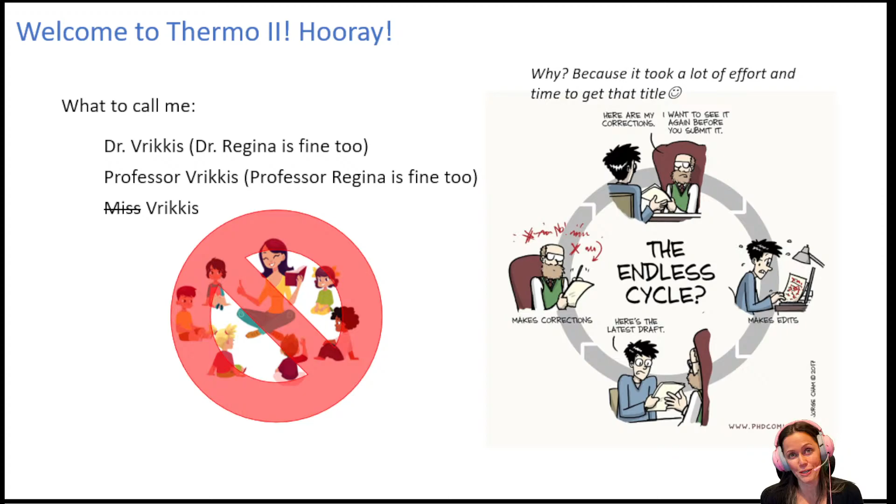I do have a couple of derpy animals. I've got my dog Leela, who's named after Leela from Futurama. I also have a couple of derpy cats, one's more derpy than the other. The gray one is glorious but also very derpy. The gray one is Joey Softballs. My husband likes to nickname most of the animals some sort of mafia name, I don't know why, I married into an Italian family, so there you go. And then Nox, as in Harry Potter, Lumos, Nox, yeah. And then I also have a couple of kids, I won't call them derpy, but a couple of kids. My daughter is Lily, she's in 2nd grade, and I have a son, Joshua, who is in middle school. Whew, don't envy that.

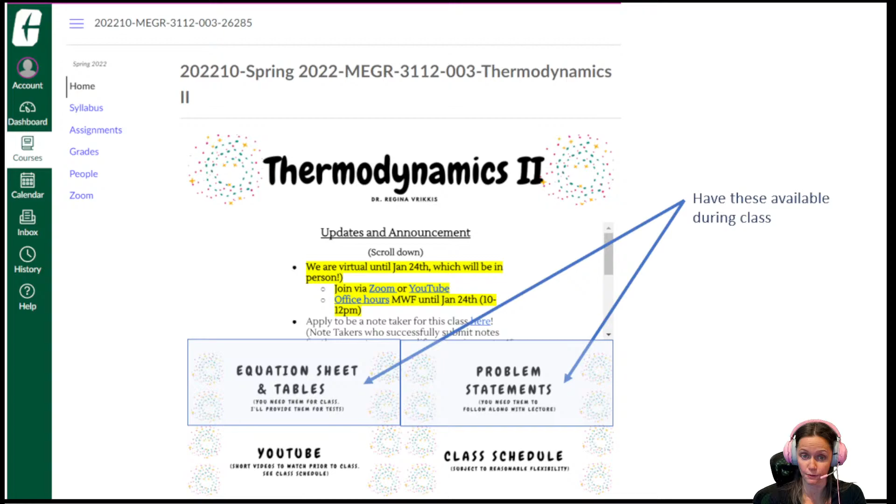That's good. I will provide you with that printed out PDF for tests, so you don't have to worry about bringing those things in. If you go to assignments, you'll see how everything's laid out.

On your view, it for some reason defaults to organizing everything by date. I see why they do it, but if you click by type, it's nice and organized and pretty—all the tests are at the top, then the final exam, and then ungraded assignments at the bottom.

Like I said, I don't have homework assignments just because of the grading burden, and we don't pay our graders enough as it is, and we really do ask a lot of them. So if I'm really giving them the work they're actually getting paid for, I can't ask them to do homework and 6 regular tests and a final exam, right?

So I don't have homework, but I do have these ungraded practice exams. The way it'll go is there'll be a couple of examples similar to what you might be asked on the test, a couple of conceptual questions, a couple of write-it-out questions, and then you'll be given the final answers after you hit submit. So once again, not graded—it's just for you to gauge how well prepared you are for the exam.

Testing is going to be done in person. I had such a horrible time last semester with academic integrity violations, specifically with Thermo 1—not so much with Thermo 2, but definitely with Thermo 1—and that was because I was doing testing online, and no matter what parameters I put in place, it was a continuing issue.

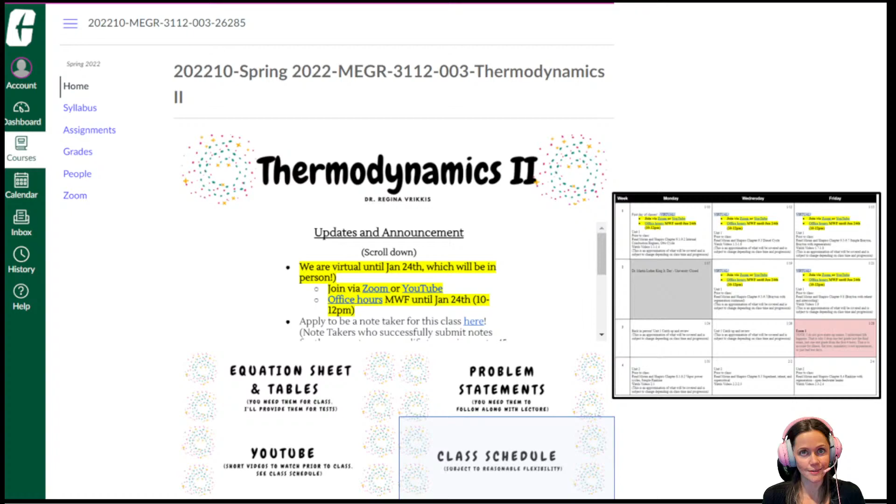So if you look at those guided notes, oh my goodness, look at those, they've got a makeover. They have clickable links in there. Amazing. So I did that last week, I was pretty proud of myself. I'm sure there's some errors there, some sort of link goes somewhere else, but hopefully everything's good.

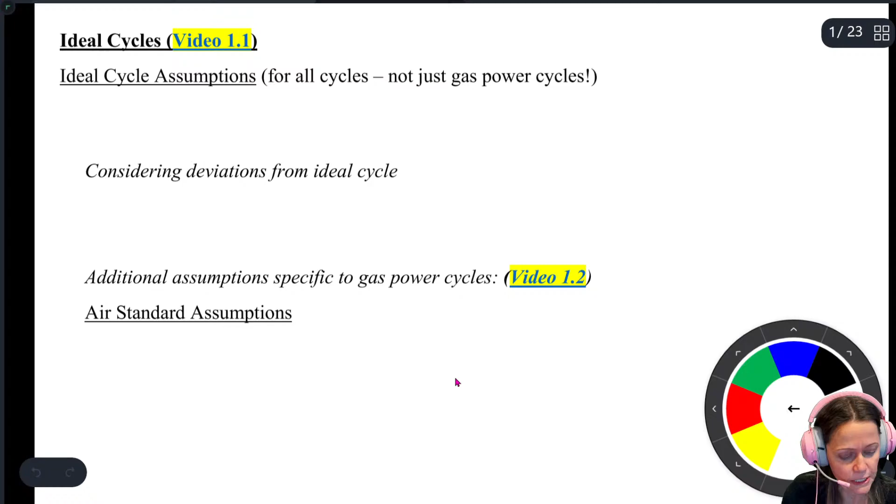All right, so ideal cycles, this is video 1.1. We're going to be talking about power cycles. Actually, I'm going to zoom in to this corner over here because we're going to be talking about cycles.

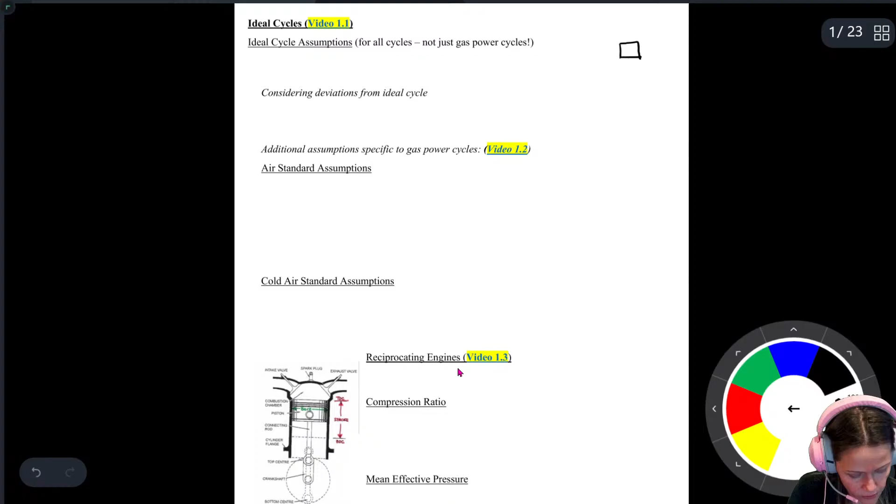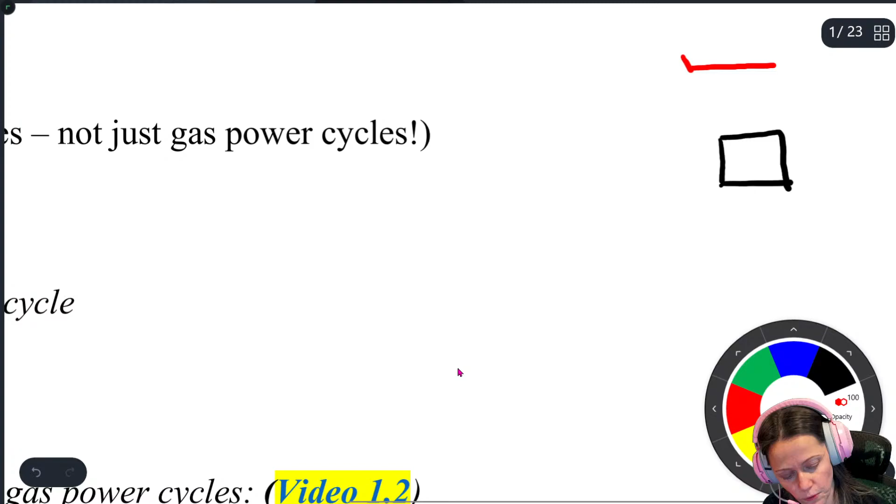We're going to be talking about ideal cycles, power cycles as well as heat pump and refrigeration cycles, and just kind of remind you of what you might have covered in Thermo 1.

We analyze these power cycles as sort of black boxes. So that box right there, that's my black box, with a clockwise arrow indicating that it's a power cycle. A power cycle works by pulling heat out of this high temperature reservoir, that's my Q dot in or Q dot H, and then it dumps some waste heat over here to our low temperature reservoir, that's our Q dot out or Q dot L. And then we have a W dot, and this is net out.

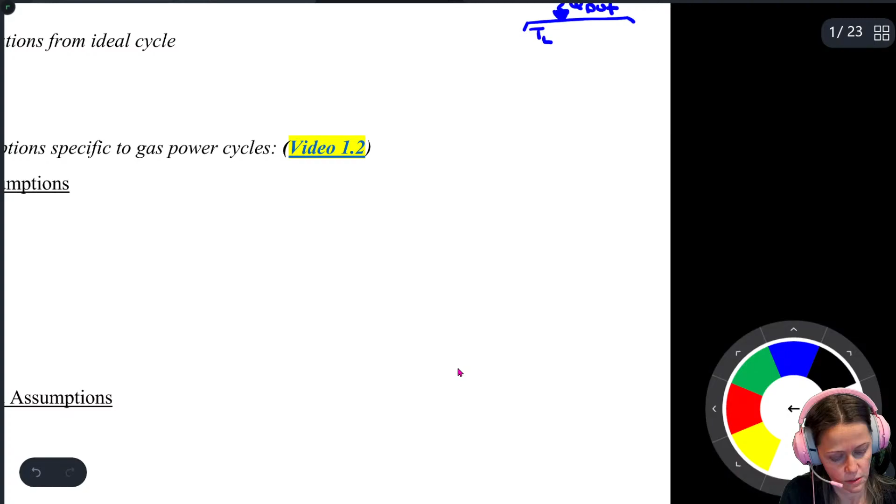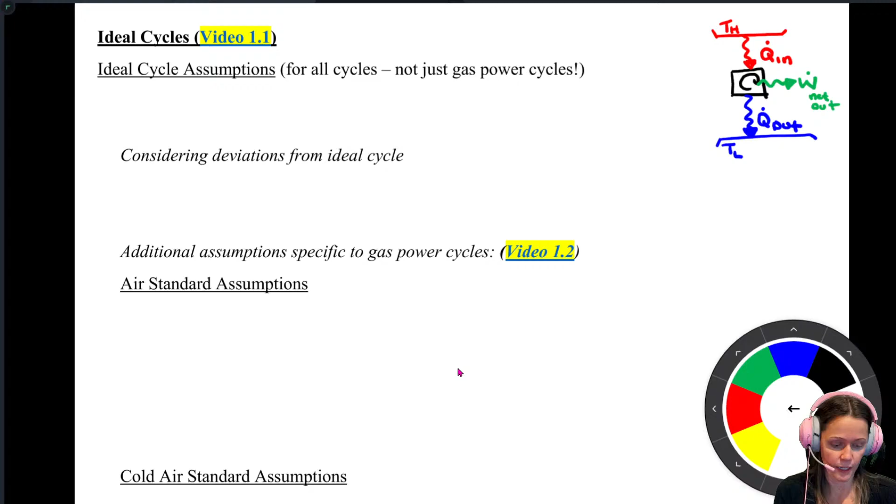Net out, so any W dot out minus W dot in. If you need a review on that, look on the second page of these notes, right there and there, those are your review videos for power cycles and what those are. But a power cycle, that's what it does. In Thermo 2, we're going to look at what actually goes on in that black box.

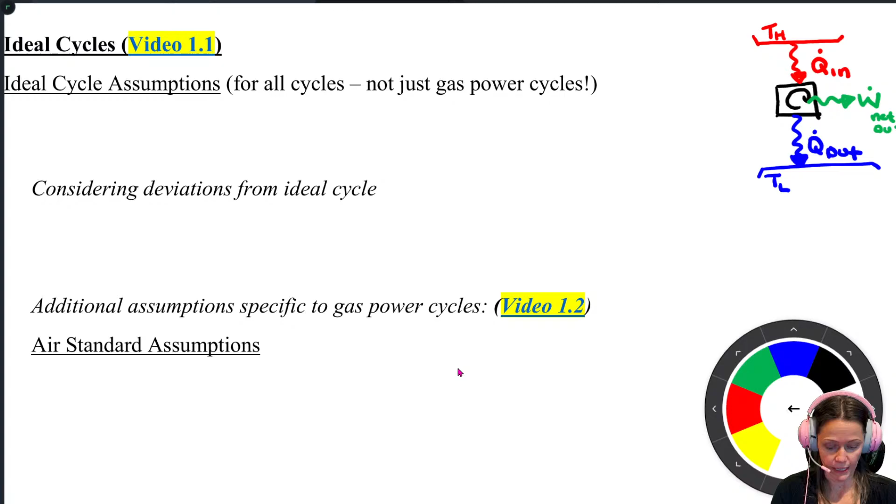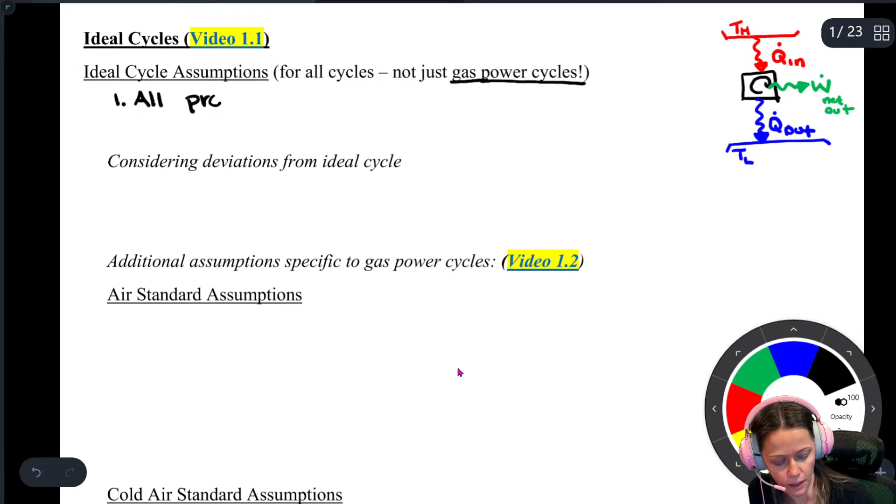And we have a set of assumptions that we're going to typically use for these cycles, and it's not just power cycles, and it's not just gas power cycles, which is what Unit 1 is about. So ideal cycle assumptions, we've got a couple of them. One is that all of the processes are what we call internally reversible.

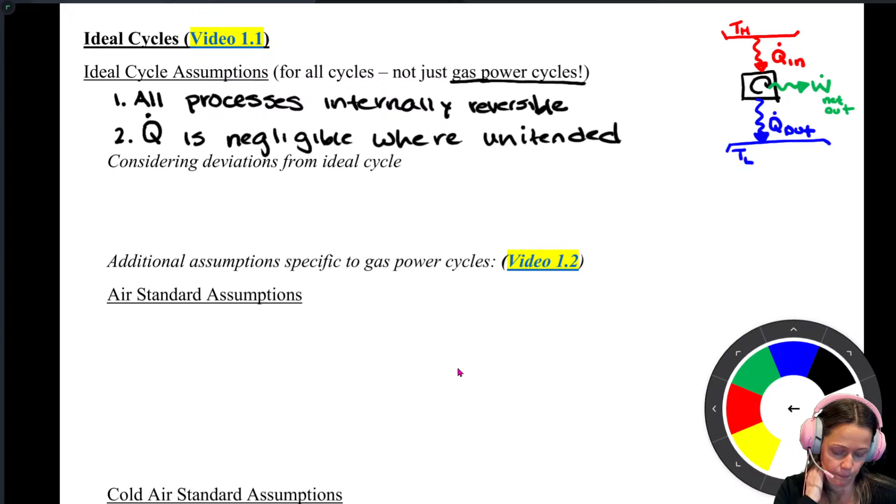So as far as deviations that we'll consider, think about what this means. If something is reversible and adiabatic, let's put that on there. If a process is reversible and adiabatic, adiabatic means there's no heat transfer. So in a power cycle, this assumption doesn't mean that you don't have any heat transfer at all. It just means that where you don't want it to happen, it doesn't happen. So in the connecting piping or something like that, you don't have any heat transfer. In compression and expansion processes, you don't have any heat transfer.

So if it is an adiabatic process and it's reversible, it's an isentropic process.

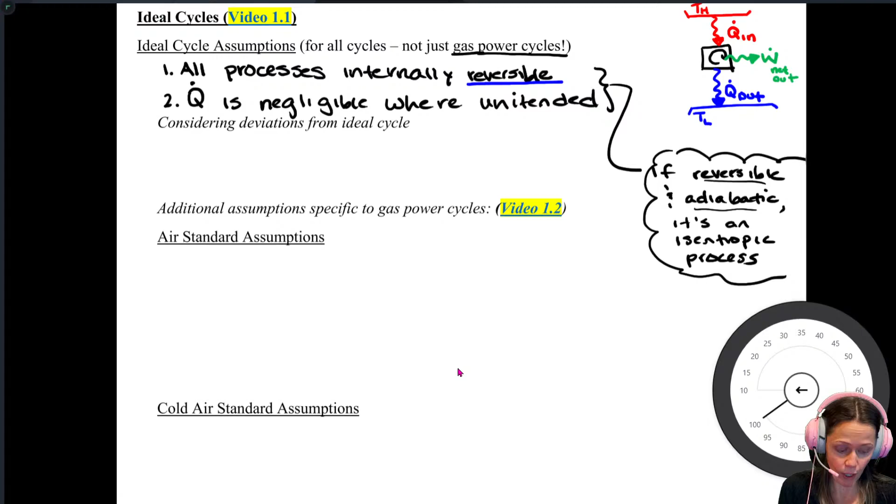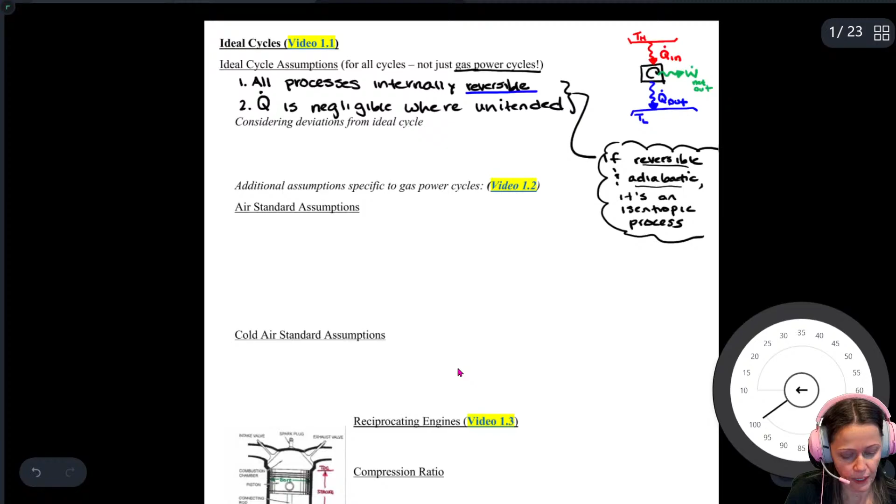So deviations from an ideal cycle would be non-isentropic expansion and compression. When we talk about Brayton cycles, gas turbine engines, we're going to be specifically talking about isentropic efficiency. You would be talking about an isentropic efficiency for a compressor or a turbine less than 100%. I'll say others here, but the others is something that we won't really talk about in this class. We're going to just focus on non-isentropic expansion or compression as far as deviations from that ideal cycle.

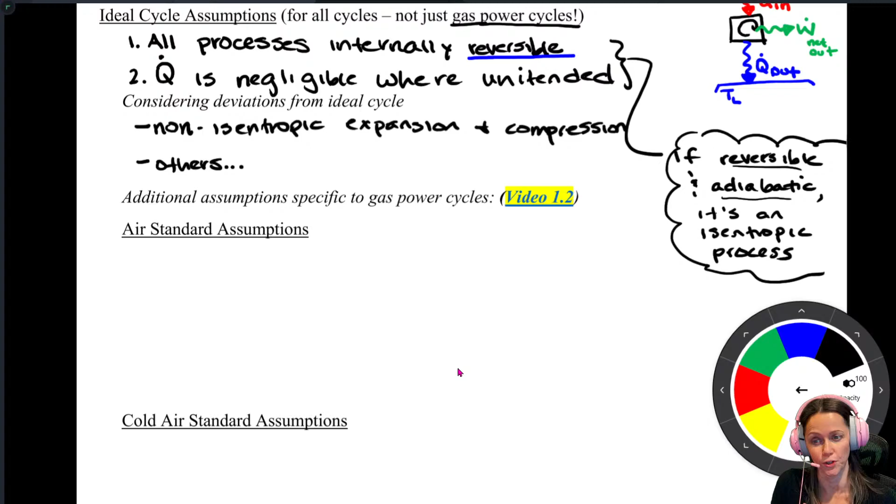Now other things that could deviate from that ideal cycle would be irreversibilities in general, so friction, maybe you do have heat transfer where you don't want it to happen, maybe you do have heat loss in the piping that you would have to account for, but that's not something we're going to account for in this class. We'll keep it nice and simple, so that's for any cycle that we might analyze.

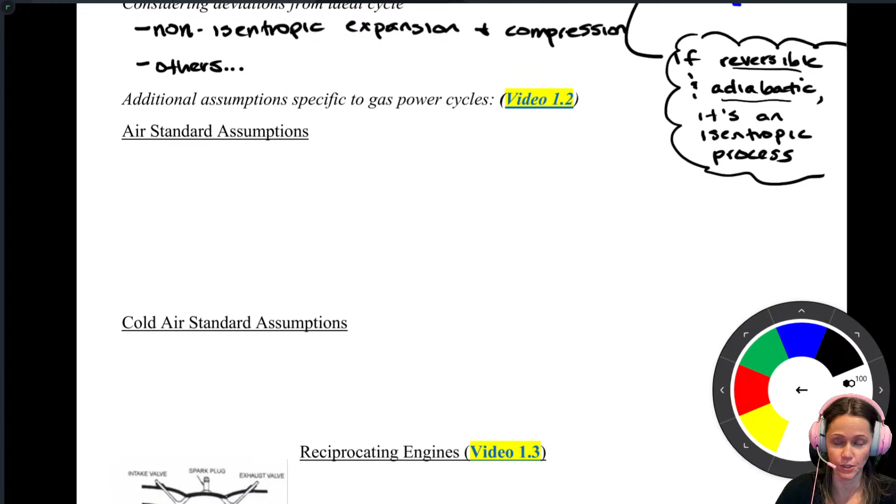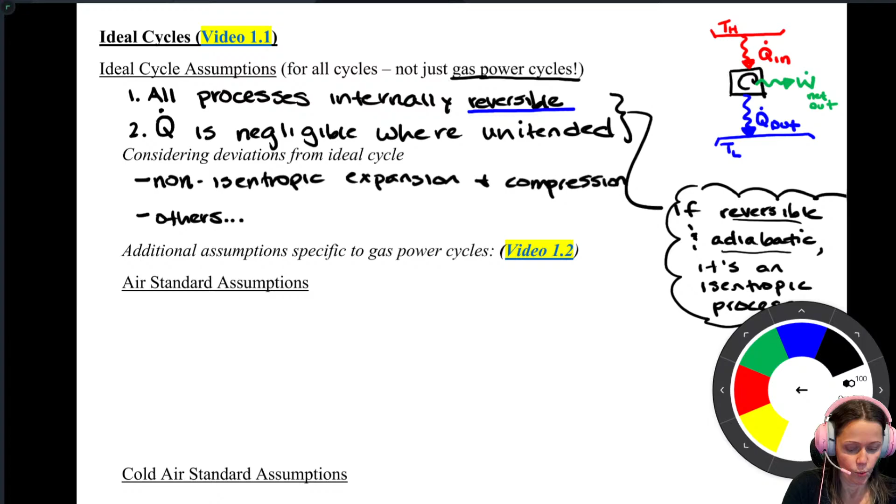We'll talk about power cycles and refrigeration cycles in units 1, 2, and 3, so all of that stuff would be applicable. These ideal cycle assumptions would be applicable for those things. We're going to focus on unit 1 and 2 on power cycles, and unit 1 is just going to be gas power cycles, so in a gas power cycle, your working fluid stays as a gas.

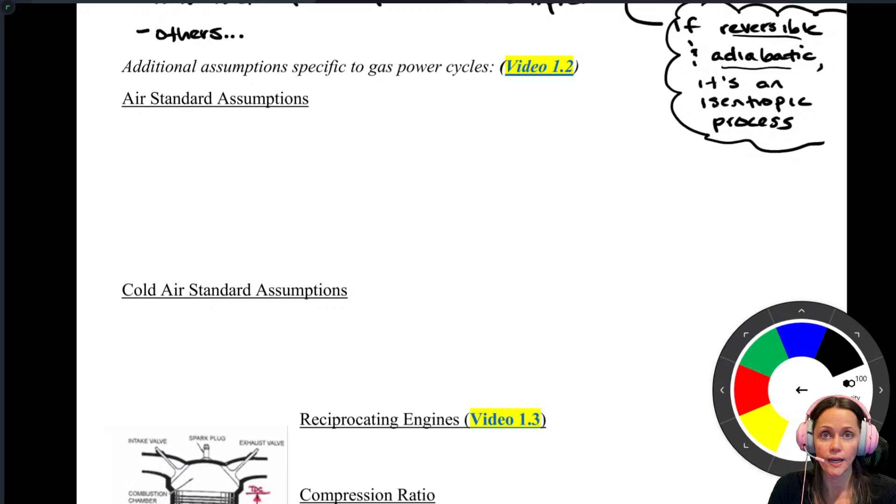We're going to have a special set of assumptions called air standard assumptions that we'll use when we talk about gas power cycles. It's sort of a subset of these ideal cycle assumptions, and there is some overlap, just so you know. But we've got a couple of these, so number 1 is that your working fluid is air.

It behaves as an ideal gas. So what that means is you need to be able to use your ideal gas law. So think of MRT equals PV. You have mass, MRT equals PV, or you could have it in terms of specific volume if you divide both sides by mass.

It also means, just as a side note, if you have an isentropic process and you have an ideal gas, you've got these isentropic relationships.

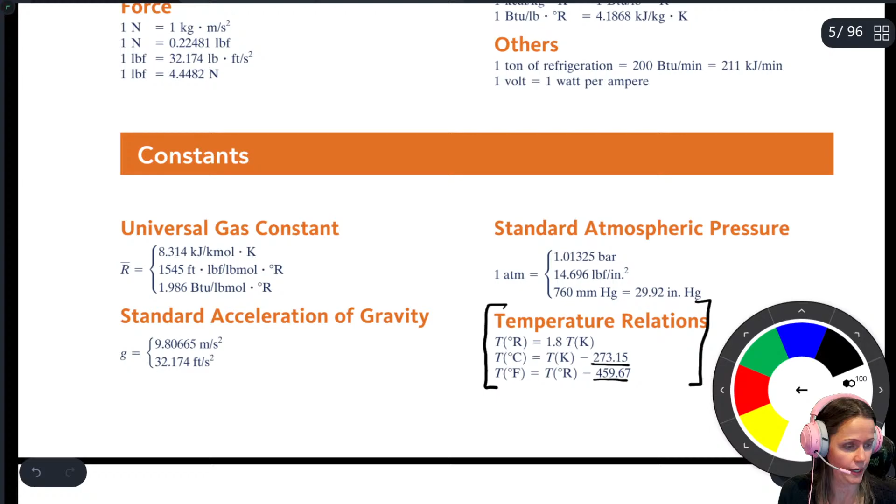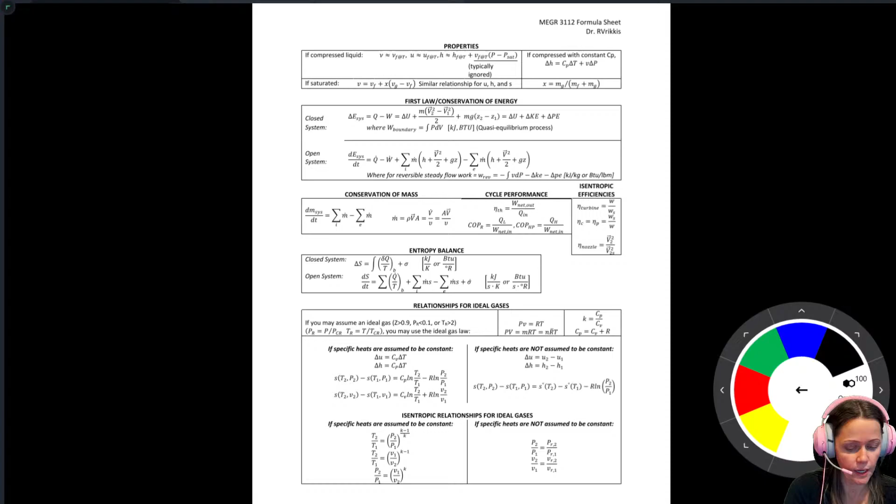So those isentropic relationships, you can find those on your equation sheet. Yeah, absolutely. So in that packet, that big PDF packet, you've got actually two equation sheets. One's the Thermo 1 equation sheet that I've used for my Thermo 1 classes, so it should be familiar if you've had me before. The other one is just for Thermo 2, but you'll have access to both.

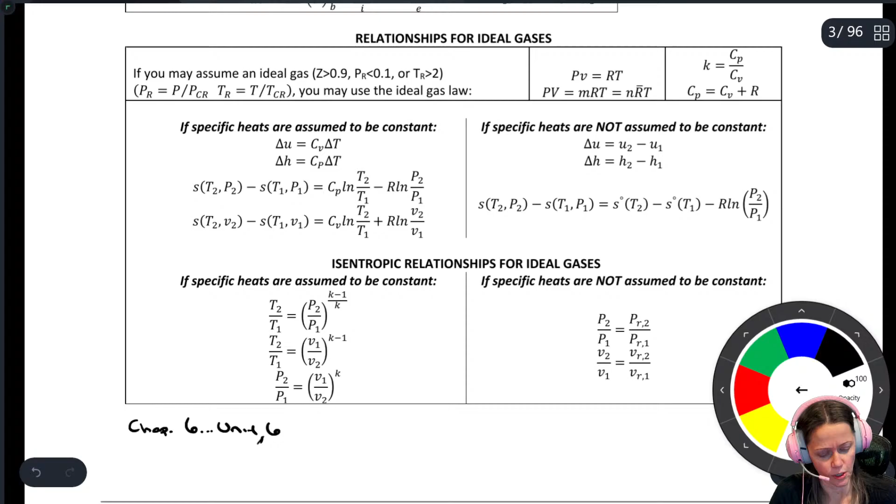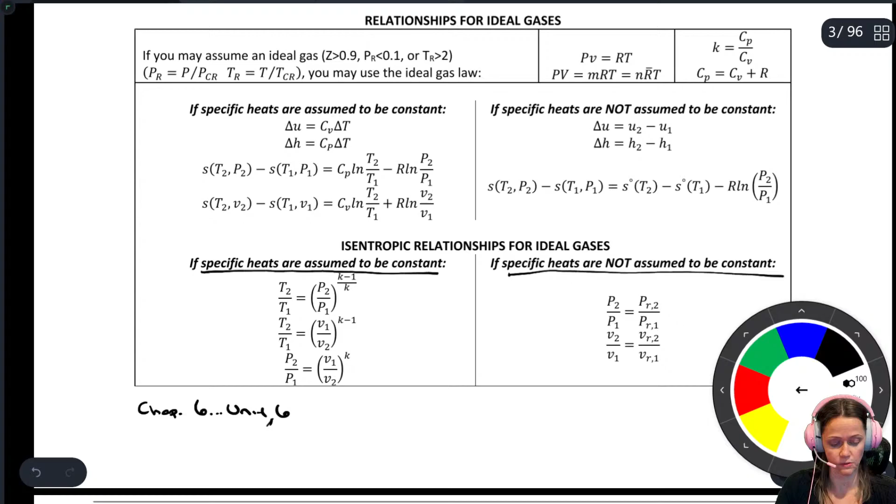So these are the relationships for ideal gases. This is all chapter 6 of Moran and Shapiro. It's my unit 6, the way that I organize Thermo 1. If you want to review, it's Thermo 5 and 6, I think, but unit 6 is where we talk about isentropic relationships for ideal gas. So you've got some equations you can use if you assume specific heats are constant, and some you can use if you don't. If you need a review on that, go review, and over here there are links for all your review videos if you need.

So working fluid is air, it behaves as an ideal gas. All processes are reversible, internally reversible, no friction — that's the big one. And then there's a little bit of overlap. The third one is that your combustion and exhaust processes are modeled as simple heat addition and heat rejection processes. So exhaust would be a heat rejection process.

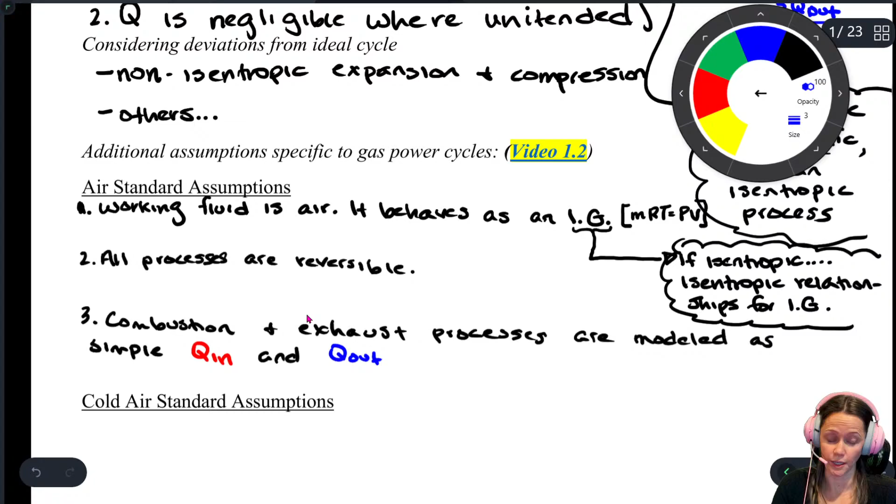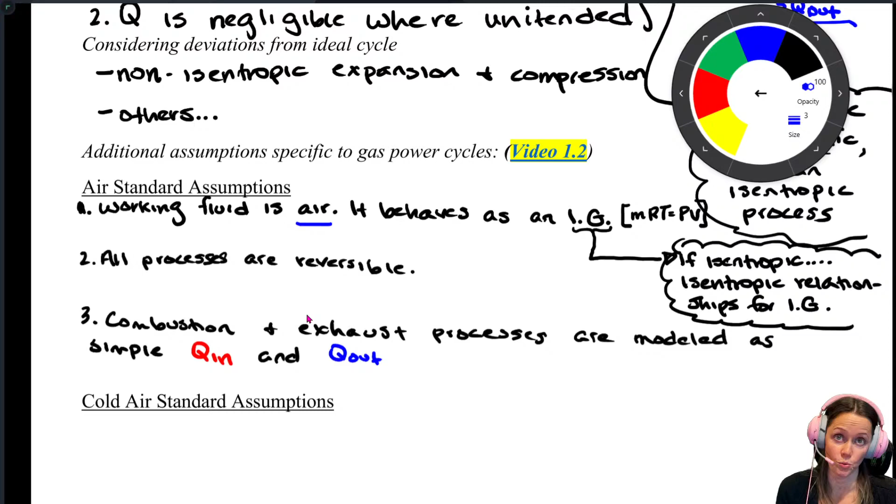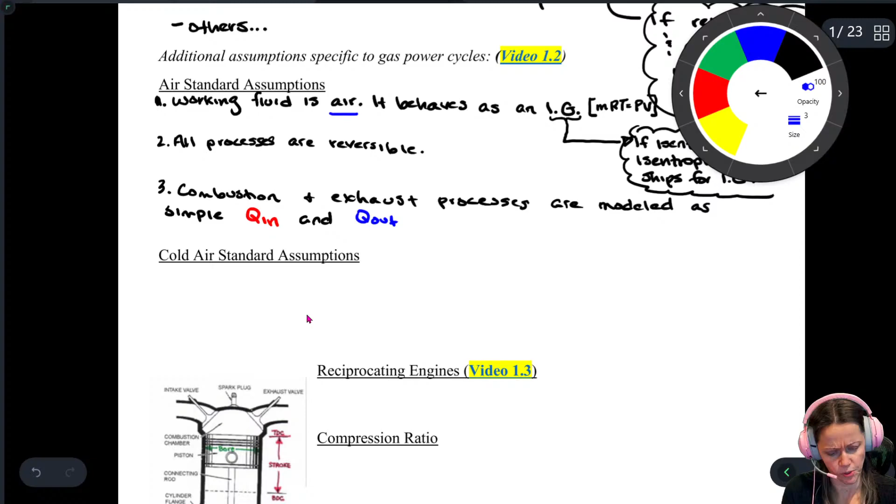So combustion specifically is a pretty complex process, right? You start with air and your fuel, you have a chemical reaction, and you end up with something else. So the way we're going to model combustion is very simple. We've got our working fluid, it's air, it undergoes a combustion process, and we're modeling that as just a heat addition process. So your air comes out at some high temperature with more energy associated with it. Once again, if you want to see that in more detail, video 1.2 is where you're looking.

And then there's a fourth assumption that gets added to those air standard assumptions if you make the assumption of cold air standard: that you have constant specific heats. And I'll say, unless otherwise specified, we're taking K for air to be 1.4. This is the ratio of Cp over Cv, taken at 300 Kelvin. That means your Cp is 1.005, your Cv is 0.718.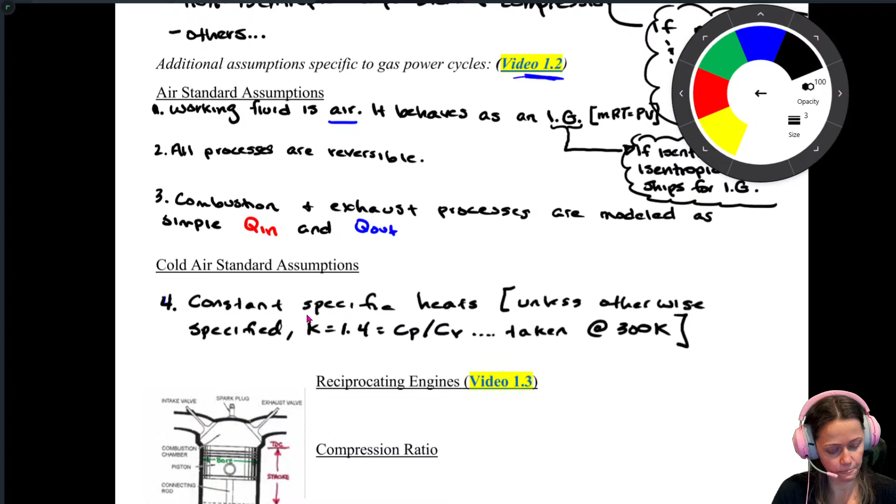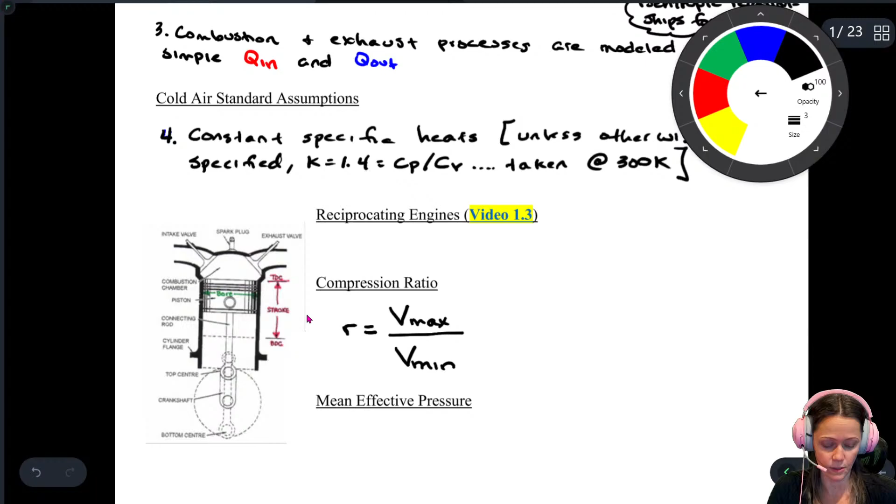Okay, keep on keeping on. 1.3 is all on reciprocating engines, meaning they reciprocate, they go back and forth between two positions, top dead center and bottom dead center. So we define this compression ratio, which would be your max volume within your combustion chamber over your minimum. You can see on the left hand side, this is a piston cylinder type arrangement, and this is your combustion chamber where it takes place. As that piston head moves down in the diagram, that's your maximum volume — the volume at bottom dead center. Then the minimum would be when whatever's in that combustion chamber is compressed, at top dead center.

And you could put that in terms of specific volume as well if you'd like.

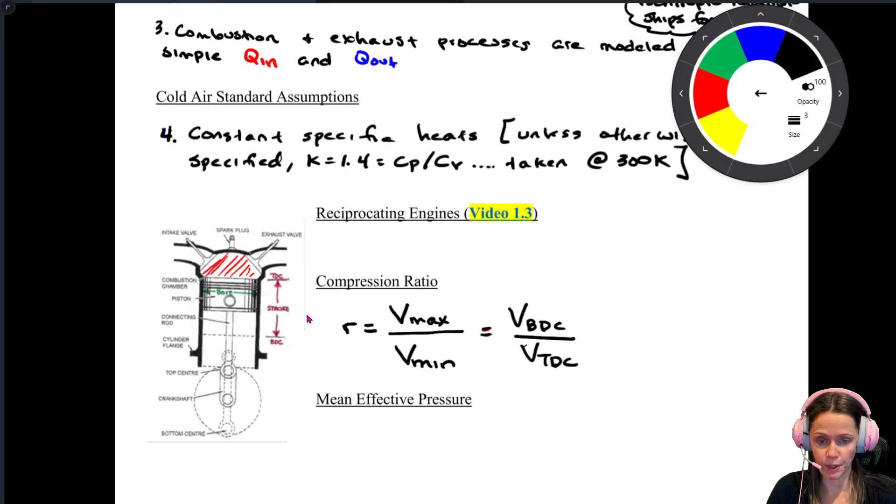Mean effective pressure is another one of these parameters that we use sometimes. MEP is a fictitious pressure that, if it acted on the piston head throughout the entire power stroke, would generate the same amount of power as the actual cycle.

It's defined as work net out, capital W, over the maximum volume minus the minimum volume.

The units here are in kilojoules per meter cubed. If you were in SI units, it might be kilojoules per meter cubed, so you'd probably need to convert to units of pressure—kilopascals, bar, PSI, something like that. So just watch your units there.

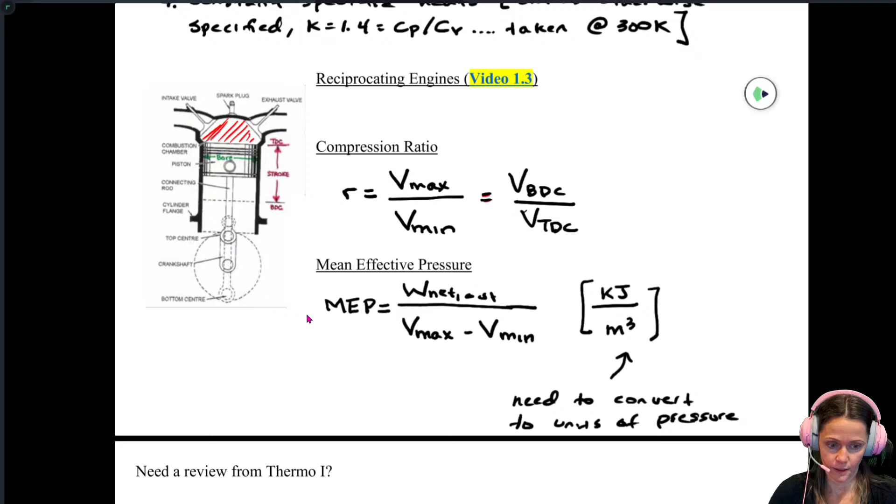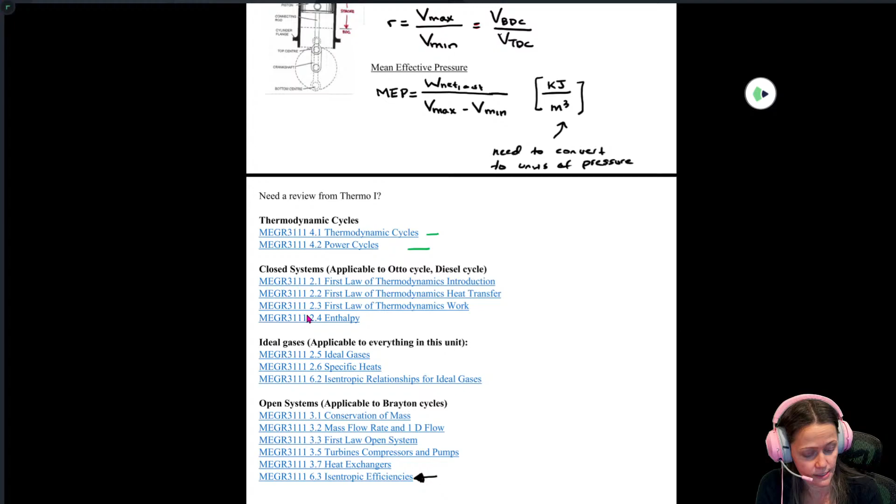I'm going to scroll slowly here. I have quite a lot of review videos if you need a review on the first law, specifically closed systems, which will be applicable to our Otto cycle and our diesel cycle, which is what we're going to cover first. Stuff for ideal gases, and then open systems, which we'll get to in a couple of lectures.

All right, but before we get to the cycles, we'll do a pretty simple review. So air is compressed in a—no, all my corrections, I didn't get that one. Darn it, have to get it next time.

Air is compressed in a piston cylinder reversibly and adiabatically from 300 Kelvin to 700 Kelvin, and we want to find the compression ratio R, assuming that air behaves as an ideal gas.

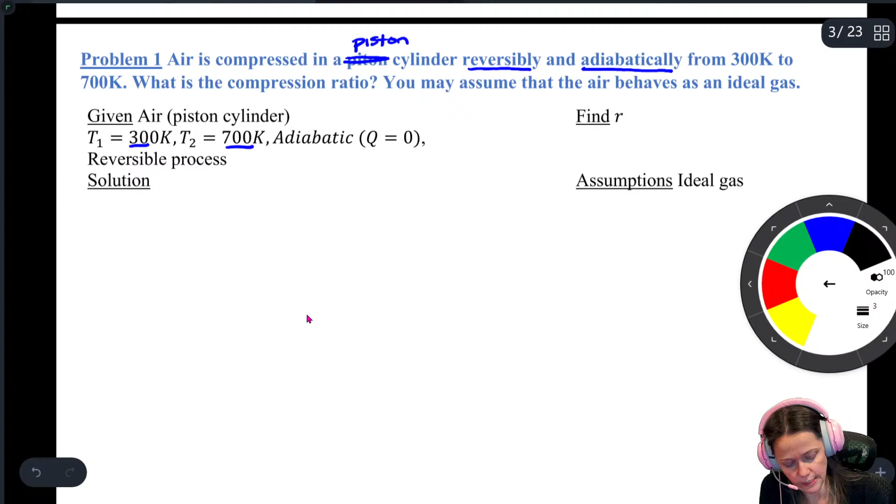To progress through this material quickly, I've already written out the given, find, and assumptions to save time. But on a test, I won't do that for you—I'll give you the problem statement, and it's up to you to list the given, find, assumptions, and solution. You need all four of those things. So as you study, just like in any engineering class, go back and solve the problems on your own, cold. Cover up the solution and see if you can solve the problem as well, including figuring out your given and find.

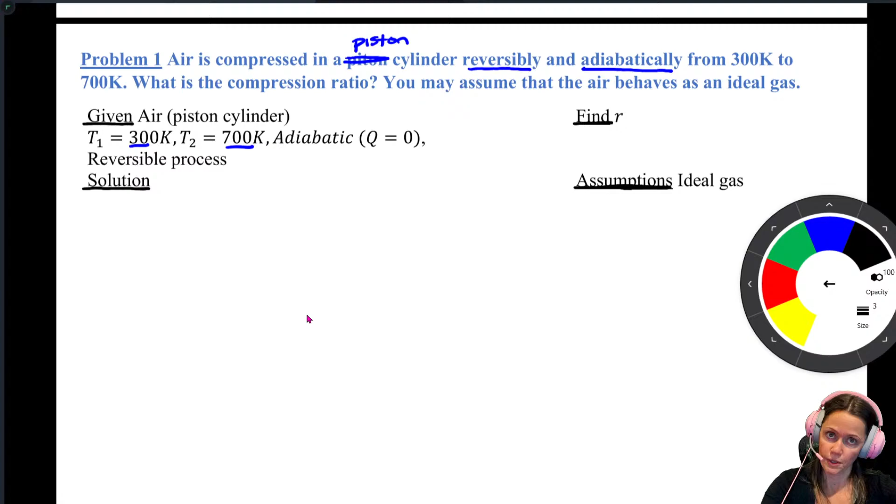So we've got air, assumed to behave as an ideal gas, in an adiabatic and reversible process. Adiabatic and reversible both mean that it's an isentropic process. We're going to keep that in mind.

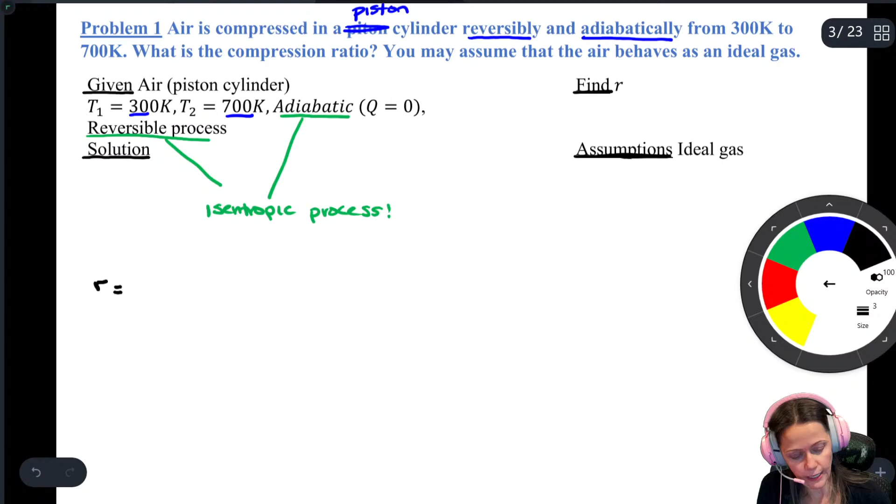I know my compression ratio is the maximum volume over the minimum volume. Since we're talking about a compression process, the maximum volume is before compression and the minimum volume is after, so this is V1 over V2. It's air in a piston cylinder assembly, a sealed system, meaning the mass is constant, so I'm not changing this ratio by dividing the top and bottom by the mass—that gets me things in terms of specific volume.

The reason I'm doing this is because I have this isentropic process, which means I can use an isentropic relationship for ideal gas. Remember, that's on your equation sheet—on the first page. This is page 3 of that big PDF packet, and at the bottom of page 3 is where you'll find those isentropic relationships for ideal gases.

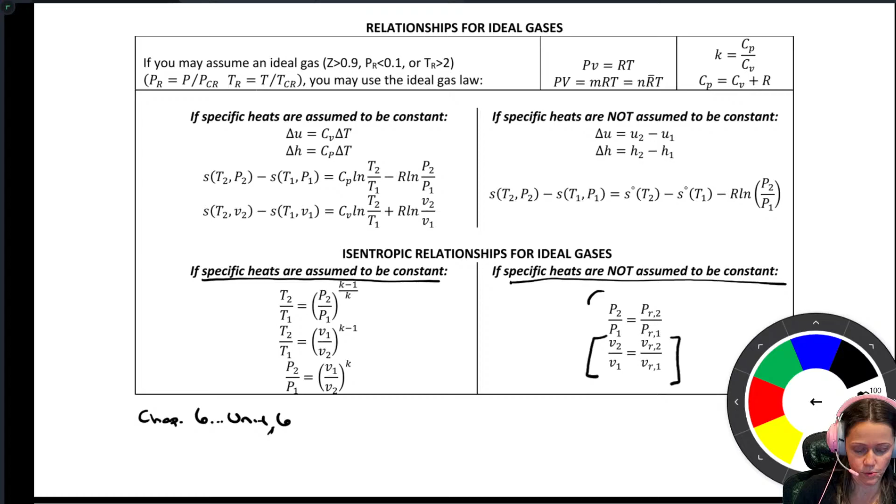If I don't assume that specific heats are constant, these are the equations I can use. My compression ratio is in terms of specific volumes, so I think this is the one I'll use. You might wonder about the ones on the left-hand side, since they look simpler—maybe we can use those. Let's do the ones on the right first, then talk about the left. The ones on the left assume specific heats are constant, so maybe not. For now, let's use this one that I've boxed in here.

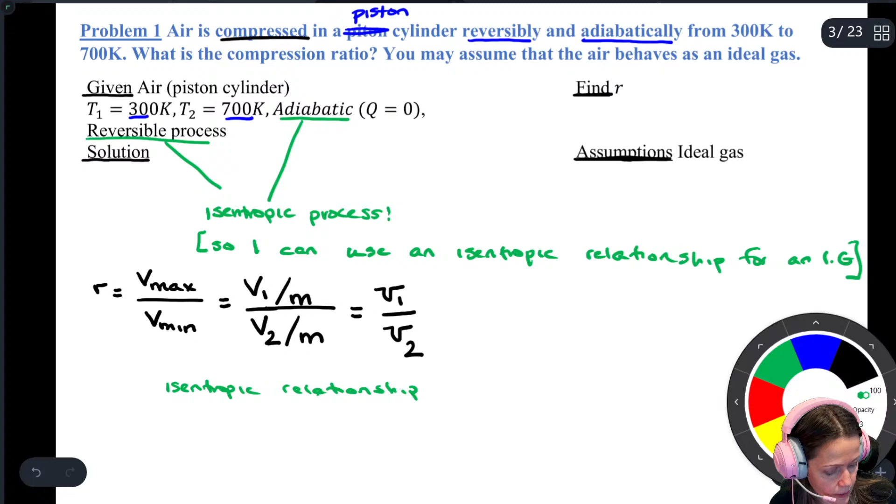Okay, so an isentropic relationship. Now I have written down directly from my equation sheet what it says. It says V2 over V1 is equal to VR2 over VR1. All right, so that's only if we have an isentropic process for an ideal gas, which we do in this case. Now VR1 and VR2, those are the relative specific volumes, and those are things that you're going to find on your ideal air tables.

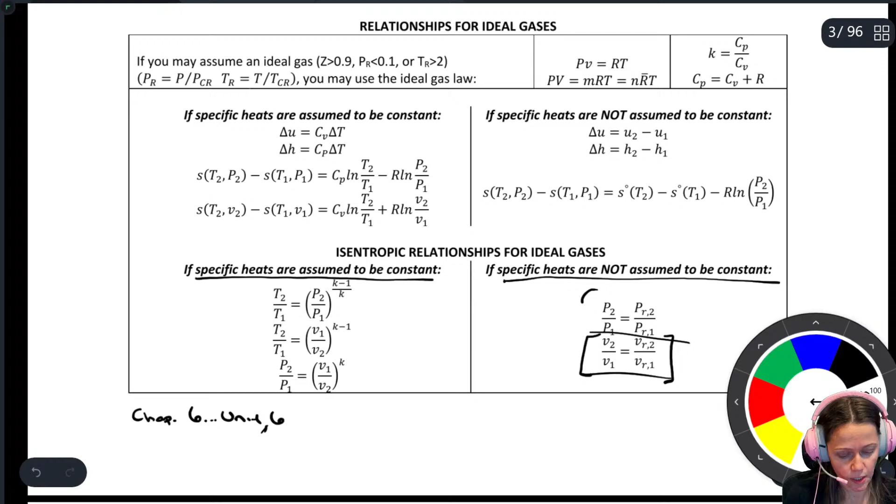So where are those ideal air tables? Well, if you don't remember, if you didn't have me before, you don't have an idea of where these are in the packet. Here we go, we got our table of contents there. It's on page 19, so I'm going to go to page 19. Here we go. So this is table A22, page 19 in that packet. And I know that T1...

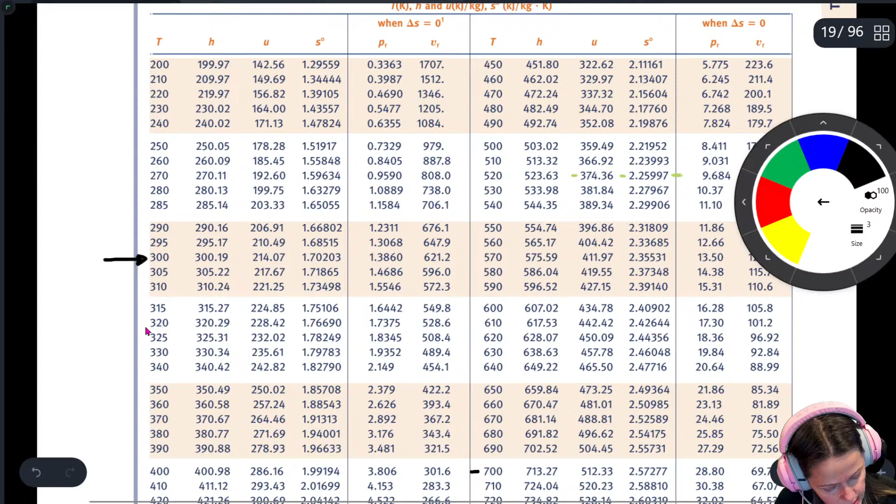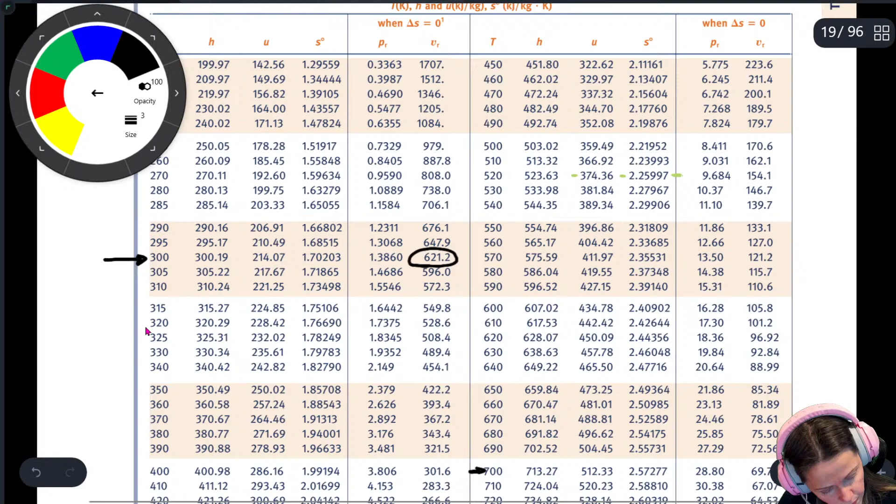T1 was 300, T2 is 700. So 300 and T2 looks like, here we go, it's 700. So looks like, and here's our VR1, and then our VR2 is that one right there. So I'm just going to pull that stuff right off the table and throw that in my equation.

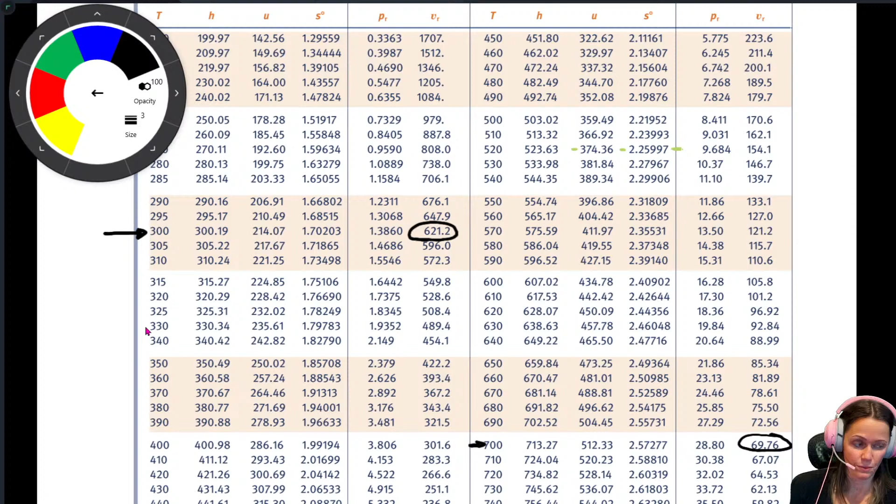Okay, so I have, this one is, 69.76. This is 621.2, but of course I'm interested in V1 over V2, not VR, or not V2 over V1. And so, of course, this becomes 621.2 over 69.76, and I end up getting 8.9.

Now I did mention that, okay, well what if we did make the assumption that specific heats are constant? You may recall from Thermo 1 that if you're not talking about a big temperature difference, one on the order of like a couple of thousand degrees, but maybe you're only talking about a couple of hundred degrees, which is definitely the case here, making the assumption that your specific heats are relatively constant is an okay thing to do. It's not going to lead to a great amount of error, right? You can have some amount of error, but a small amount of error might be okay with you.

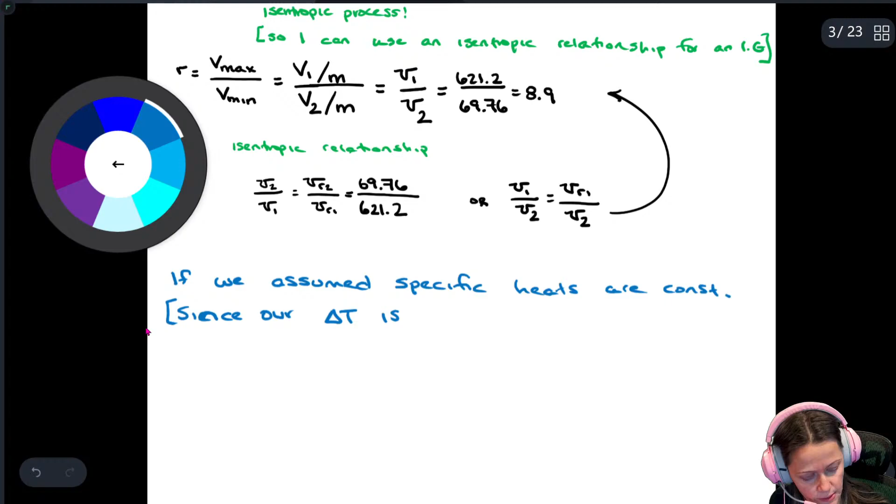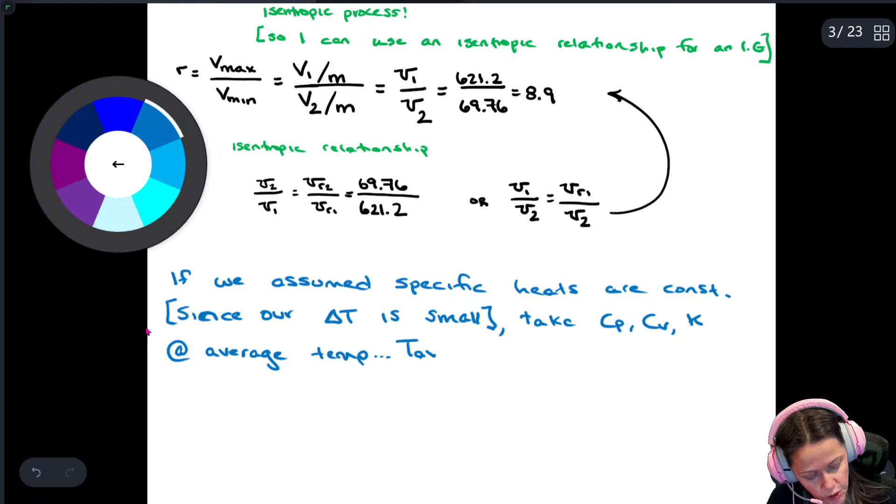So let's put it like that. If we assumed specific heats are constant, since our delta T is small, being on the order of a couple of hundred, not a couple of thousand degrees temperature difference, we'll take those CP, CV, and the ratio of those two things at the average temperature. So our average temperature in this case, we're looking between 300 and 700, so that'd be 500, right? 500 Kelvin.

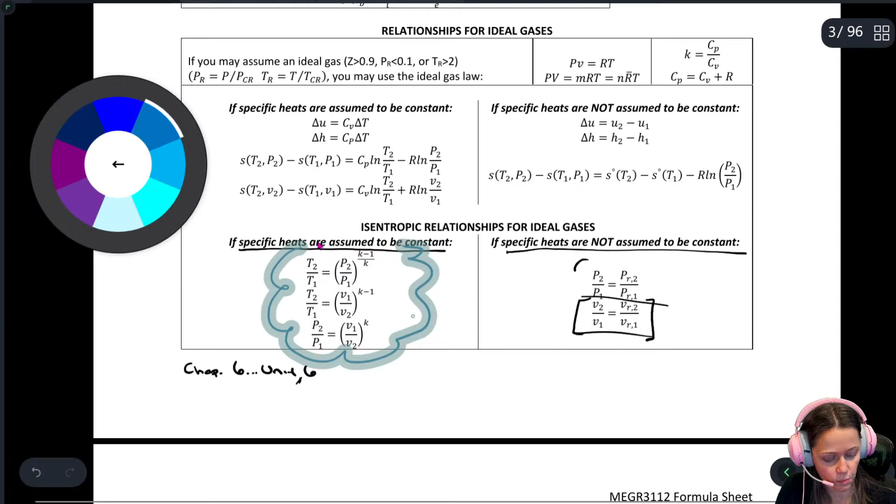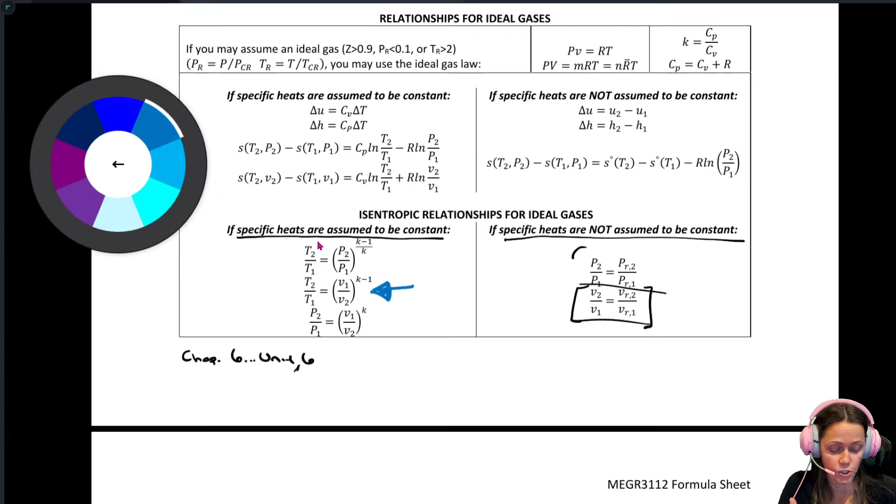And if you look in table A20, we can get whatever value that we want. But we're going to use our isentropic relationship, where we assume specific heats are constant. And I think we can use either, all three of those are valid, but I think this second one is going to be the one that we need, because we're interested in the ratio of those specific volumes. We know the temperature, we're going to be able to figure out the K value. So let's use that one. Let me look at that again. Is it switched? Yes, it is.

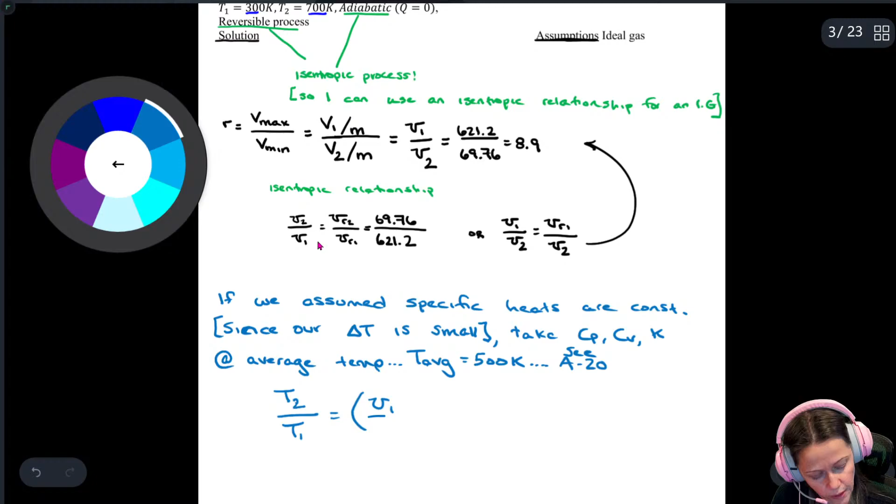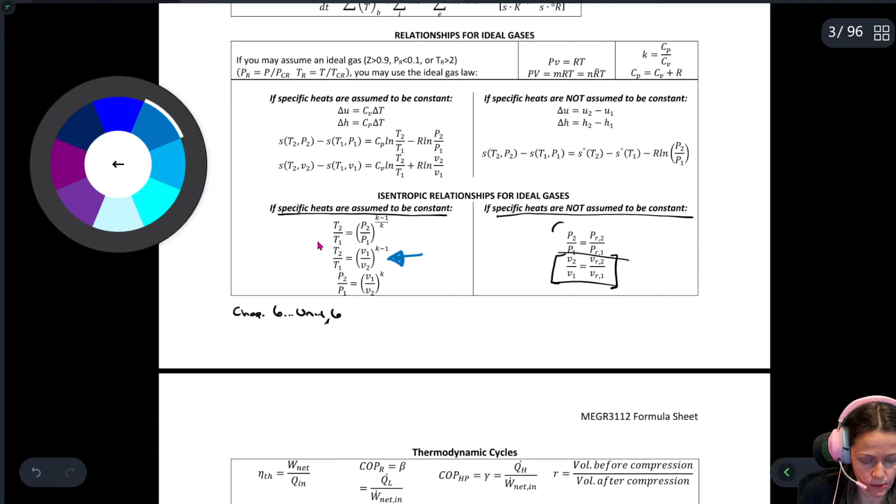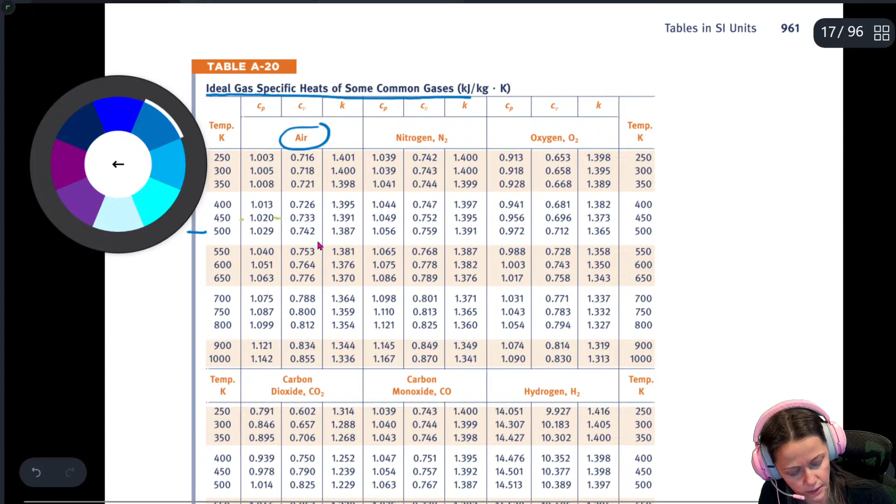So T2 over T1 is equal to V1 over V2 to the K minus 1. And at 500 Kelvin, let's go look at what our K value would be. So table A20 has, let's go get A20. There we go. So ideal gas specific heats of some common gases. We've got air, we're looking at 500 Kelvin, and our K value would be 1.387. So this is table A20, 1.387.

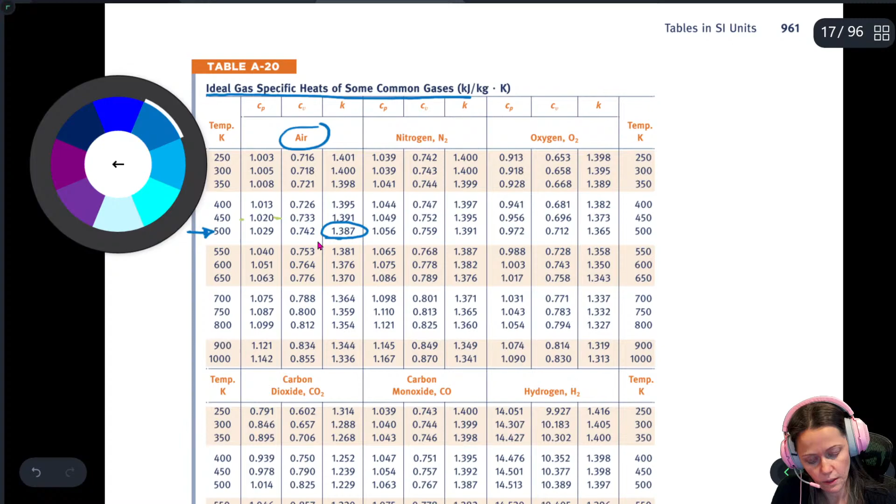So I'll plug in that K is equal to 1.387 and solve for v1 over v2. It will be very close to 8.9. The first way that we solved it is a lot more accurate, but the second way, if you're not talking about a huge temperature difference, is probably okay. Depends on how accurate you need to be.

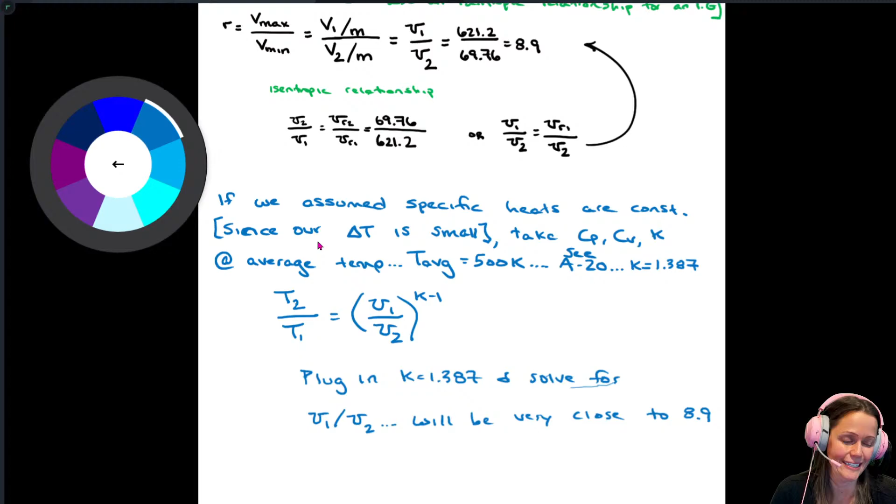Sorry guys, for those of you who were paying attention, I guess. Just, all right.

All right, thanks David. All right, so let's look at the first law review. So closed system, this is going to be where we're talking about our Otto and our diesel cycle. And then for our open system, we're going to be talking, that's going to be used for our Brayton cycle or our gas turbine cycle.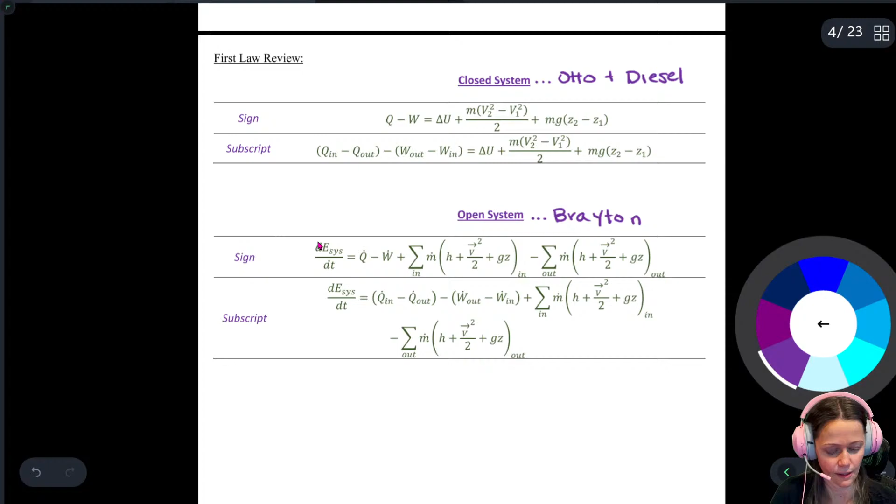In Thermo 1, we use sign convention, but in Thermo 2, when we're talking about cycles, we're going to be using subscript convention. I'm sorry, I'm all thrown off now.

So subscript convention: instead of using Q or W with a positive or negative sign to indicate whether energy is going into or out of the system, we use a subscript, so Q in and Q out, W in and W out are all positive numbers. The first law in subscript convention and sign convention are both given on your equation sheets, so you don't have to memorize them, although after writing it down so many times, you probably will.

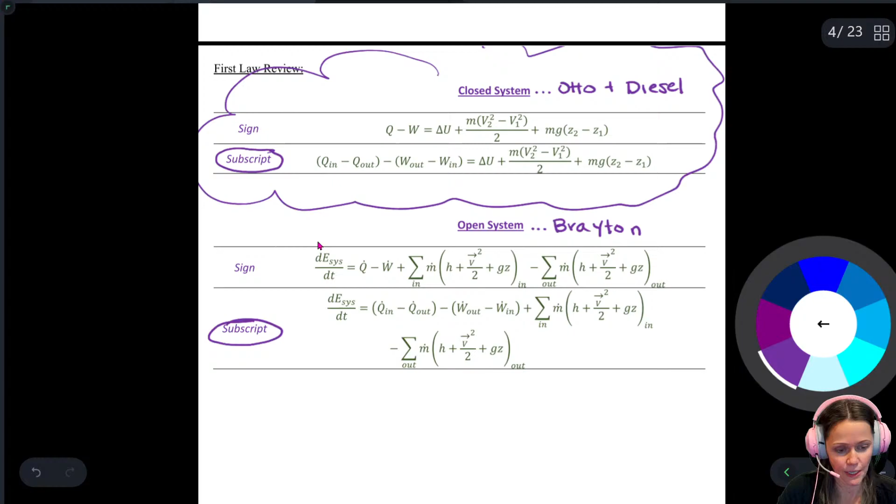For the first cycles we're going to talk about, we'll do closed system analysis. We have about 10 minutes, so we're going to introduce the Otto gas power cycle. The Otto cycle is what we'll use to model the gas power cycle, so a gasoline engine, which is a spark ignition engine.

The actual cycle—I have some nice little videos I borrowed from somewhere, video 1.4, I hope I gave them credit—some awesome animations that somebody made.

The actual cycle consists of a piston cylinder arrangement with two valves, an intake and an exhaust. Fuel and air come in through the intake valve into the piston cylinder, then it's compressed to a high temperature and pressure. A spark plug initiates the combustion process, which forces the piston head down. When it comes back up, the products of combustion go out through the exhaust. That's the actual cycle.

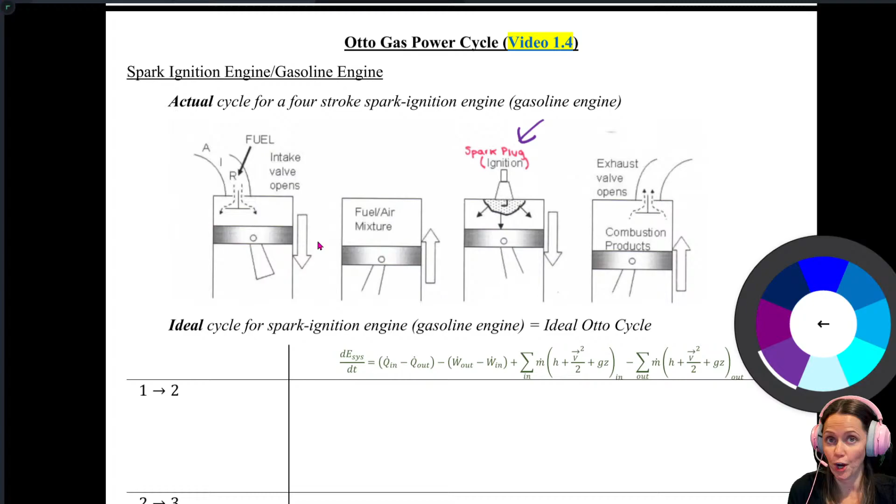It's not actually a thermodynamic cycle, because a thermodynamic cycle would have the same working fluid undergo a cycle so that the initial and final states are exactly the same. That's not really what's going on, but we model it with a thermodynamic cycle anyway—a very simple model of the internal combustion gasoline engine. There are other models, but this one is the simplest.

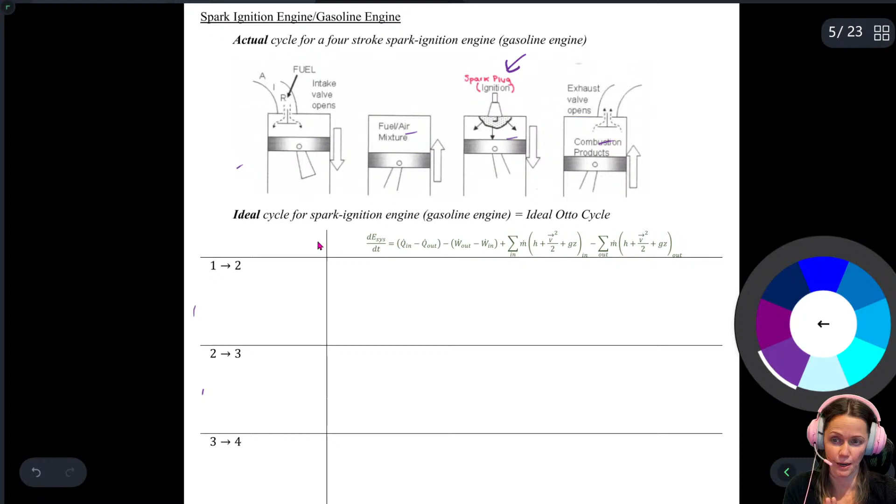There are going to be 4 processes. I'd caution you against trying to tie each of those processes, 1, 2, 3, 4, exactly to the actual engine strokes, because it doesn't map perfectly.

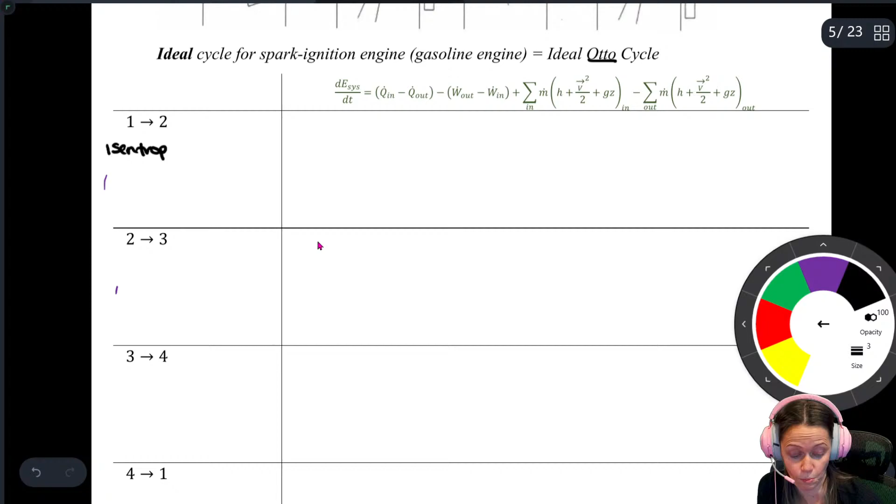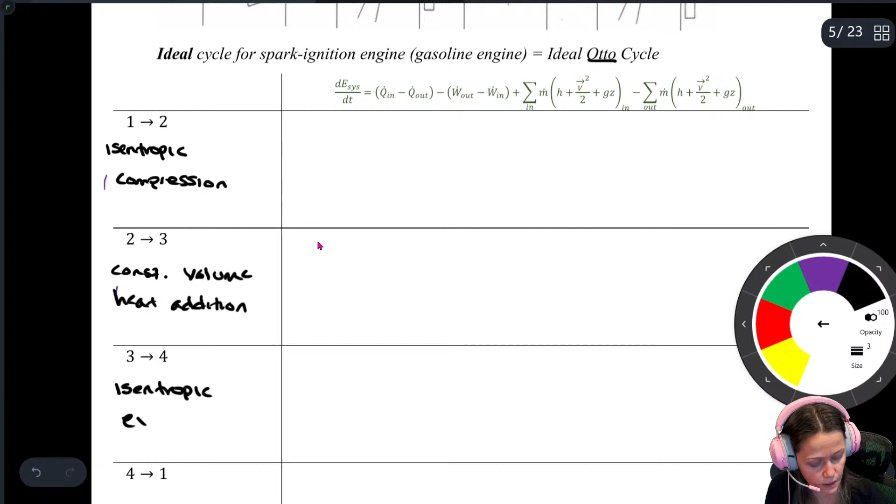In our special model, the Otto cycle, we have 1 to 2, which is an isentropic compression. 2 to 3 is a constant volume heat addition process. 3 to 4 is an isentropic expansion process. And 4 back to 1 is a constant volume heat rejection process.

So from 2 to 3, that's where we're modeling our combustion process, and from 4 to 1, we're modeling our exhaust process. All right, so let's apply this.

What in the world did I do? Oh, what in the world—I've got my first law for an open system here, that won't do at all. All right, here's what we're gonna do—mark this out, can't believe I did that. So we're modeling this as a closed system. What I'm going to do is apply my first law here, and for a closed system it's going to be...

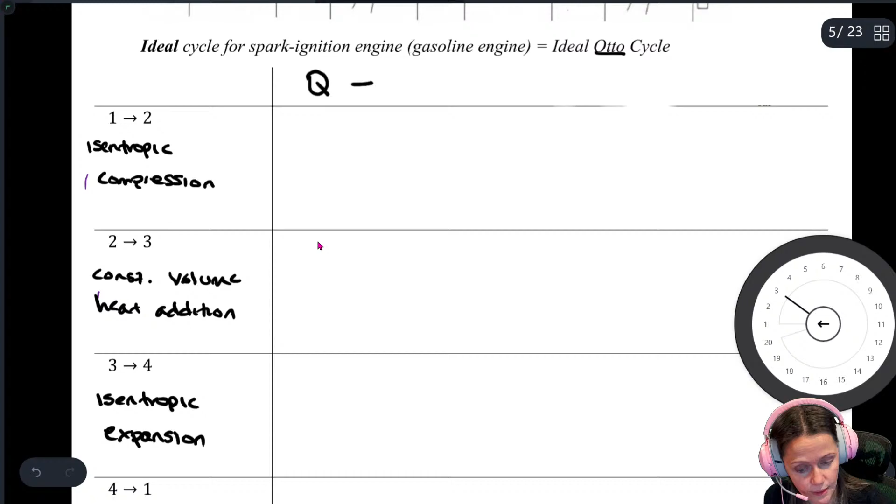Q in minus Q out. All right, you know what, it's 2:09, we'll stop there.

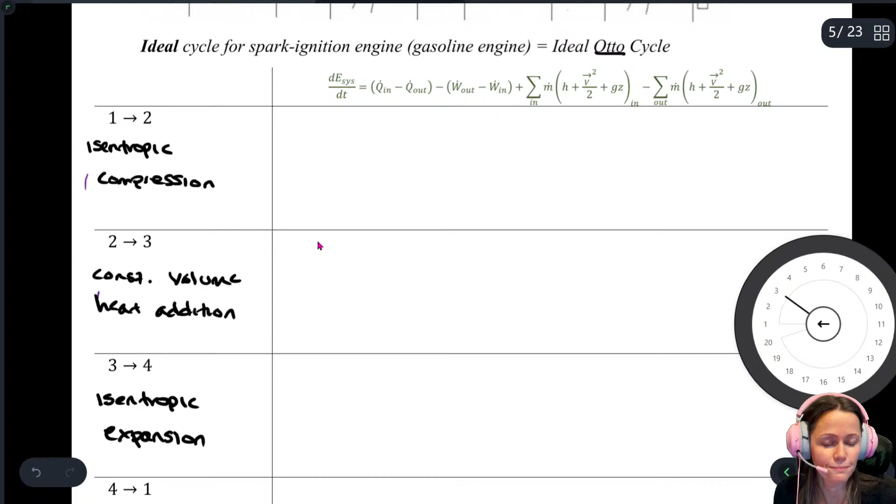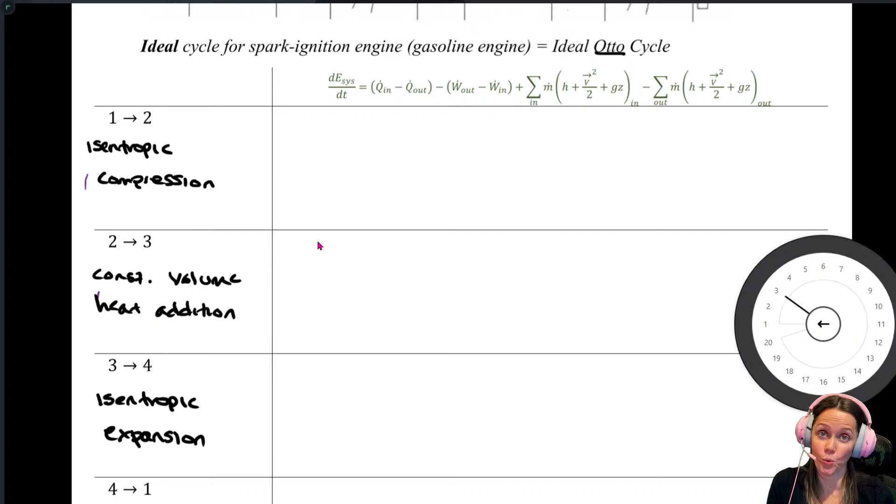Next time we meet, we will derive these equations, but if you want to get ahead, go ahead and watch the video on the Otto cycle, video 1.4, where we'll work a problem. Next time we meet we probably won't progress much further—we'll work that problem and then start to talk about the diesel engine. So make sure you watch, I'd say go ahead and watch up through video 1.5, and that way you'll be safe, okay.